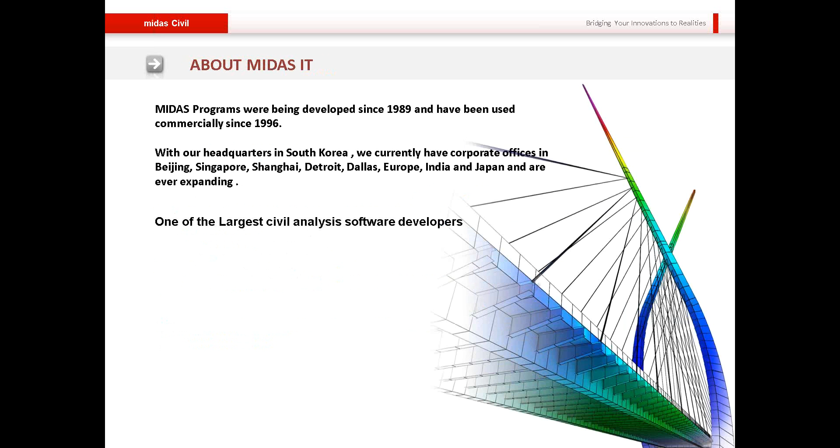First up, about Midas IT. We've been developing programs since 1989, when initially we were formed as an offshoot of the POSCO group, and commercially we have been doing so since '96. We were incorporated in 2001, and currently we are headquartered in Seoul, South Korea, with offices in China, Japan, Singapore, London, India, and the United States as well, and we are ever expanding. We are among the largest CAE software developers in the world, with a proven reliability of over 5,000 project applications, following an intensive quality control system, together with our analyses having been verified by various institutions the world over.

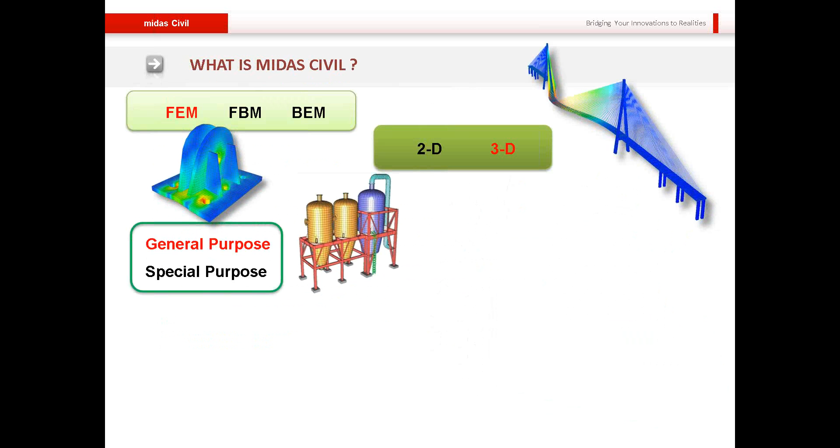Talking about our product, Midas Civil. For those of you who are not aware of the program, Midas Civil is a finite element analysis package specialized for both 2D and 3D finite element analysis. It is at once a general purpose as well as a specialized purpose tool, in that it can be used by both structural and geotechnical engineers. Although it is geared towards the bridge engineer, it is also capable of handling other civil structures like underground structures, basements, buildings, plants, tunnels, and dams.

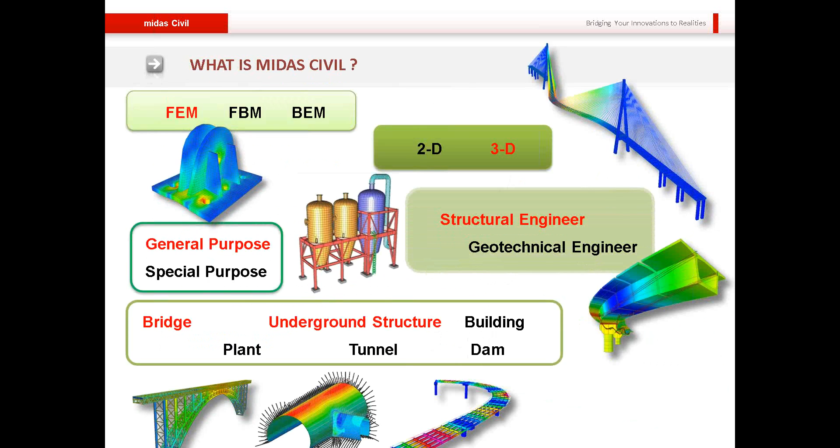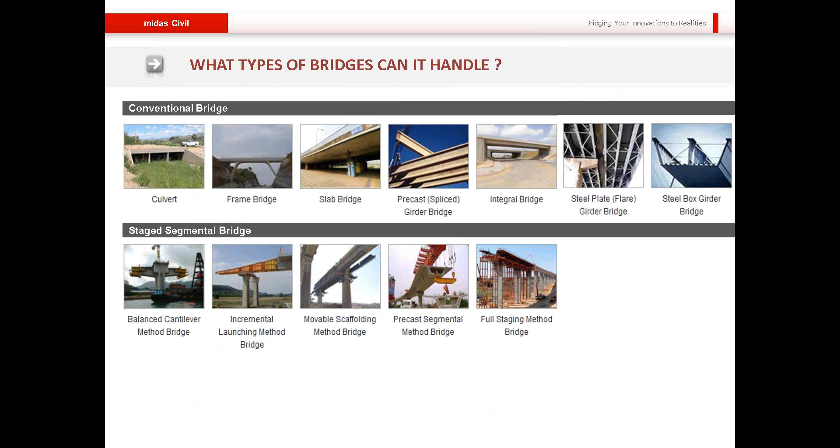Of course, when it comes to design, it is more geared towards the bridge engineers. And speaking of bridges, Midas Civil can easily handle conventional bridge types like culverts, slab and girder bridges, integral bridges, to the more complex staged segmental bridges - for example, bridges constructed using the balanced cantilever method, incremental launching method, the full staging method, and others. The software can also handle the most complex cable bridges: cable stayed bridges, suspension, and extradosed bridges.

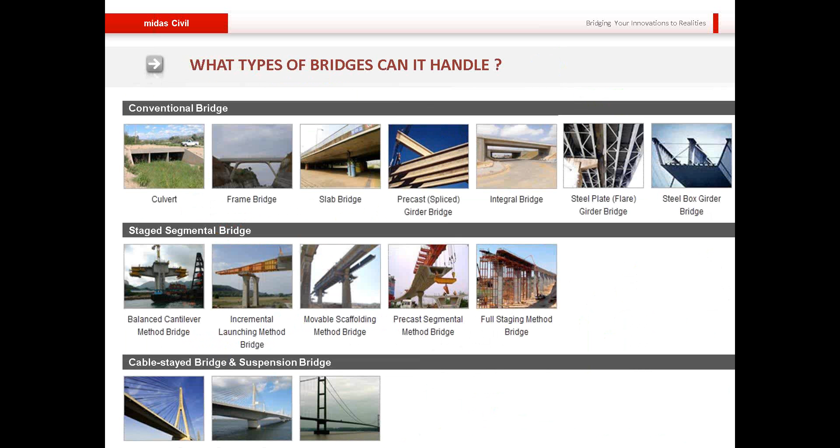Let's now get into the crux of today's presentation. First, let me talk about the modeling philosophy that is commonly associated with cable stayed bridges.

First and foremost, I'll talk about initial sizing for cable stayed bridges. Now, aside from loadings, the pylon and deck geometry and orientation are usually driven not by engineering decision but more by cost and aesthetics.

Engineering decisions usually come into play first and foremost when we are proportioning the spans, particularly the ratio between the side span and the main span. In these cases, backstay forces are a critical determining factor, especially because backstay forces are maximum when the live load is on the main span and at their minimum when it is on the side spans. And because backstay forces usually get the largest stress variation among all the cables, they have to be dimensioned so that these stress variations are kept safely below their fatigue strength.

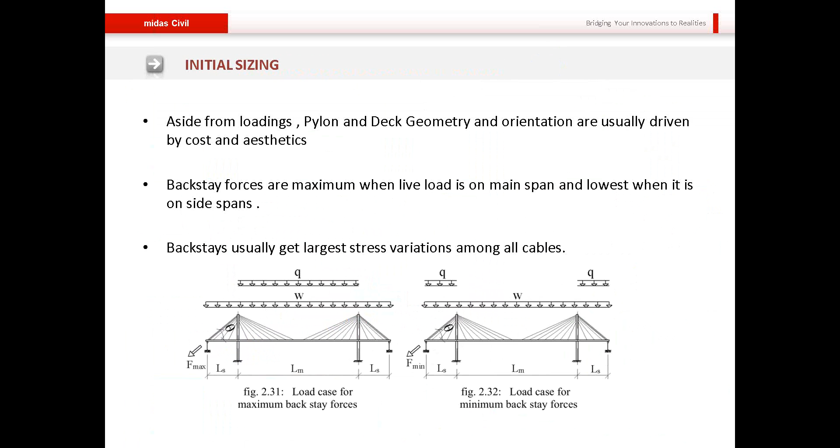A lot of research has gone into this proportioning over the years. One such research by Gimsing and Georgakis in 2011 is what I'm showing you today. On this graph, you can see the ratio between the side span and the main span plotted on the vertical axis, and the ratio between the live load and the dead load plotted on the horizontal axis, and how this compares. The value of zeta shown just above the curves is essentially the ratio between the minimum possible backstay force to the maximum possible backstay force experienced by any particular bridge.

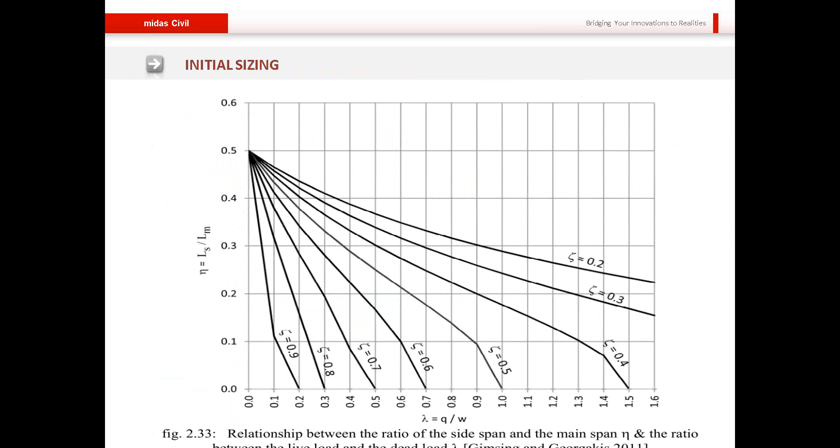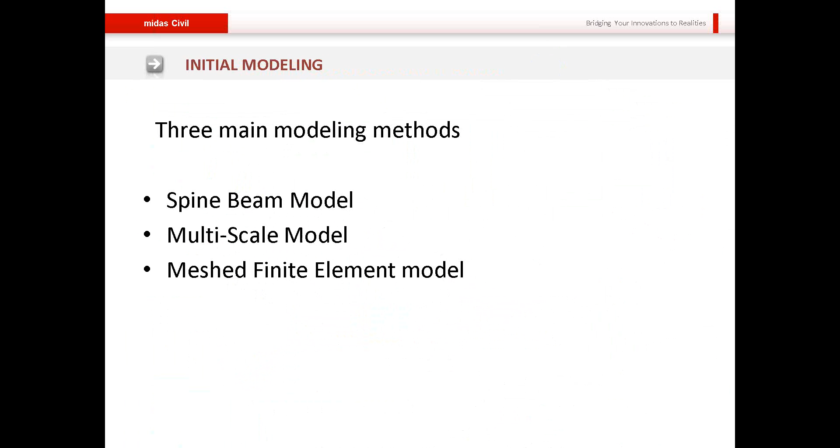Progressing a little bit further, let me now talk about the modeling methods for software-aided modeling of cable stayed bridges. We have three major modeling methods utilized in the world today: spine beam or line beam models, multi-scale models, and meshed finite element models. Let's talk about these one by one.

First up, the line beam or spine beam model. This is the most common modeling method around the world today, not only for cable bridges but for nearly any kind of bridge. The bridge is modeled using beam, truss elements and links which represent the bearing or support conditions. The deck section can be modeled simply by using equivalent section properties like moment of inertia, shear area, and so on. Therefore, it is usually a preferred method of modeling, particularly for an initial estimation or initial analysis.

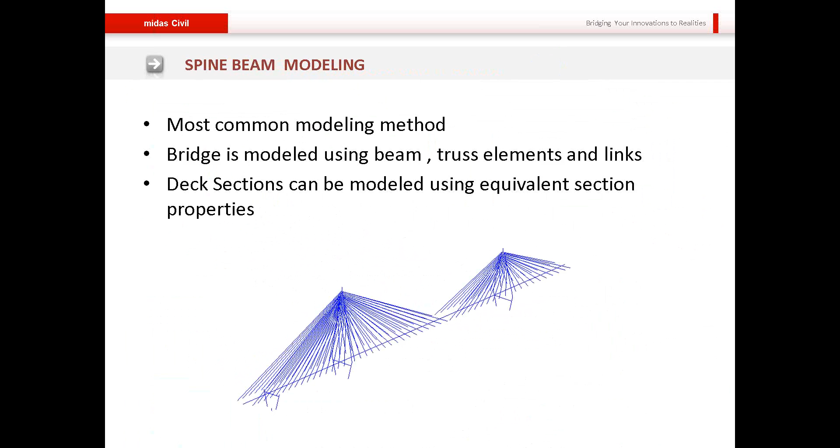Let me talk a little bit about modeling of cables. As we already know, cables are highly nonlinear structures. The stiffness of a cable element is directly dependent upon the amount of axial force that it is carrying. So in normal linear static analysis, this nonlinear effect of the axial force also has to be considered, and to undertake that, the Ernst formula is commonly utilized. So in Midas Civil as well, the Ernst formula is implemented via the use of the cable element, which can automatically consider the effect of sag and modify the stiffness of the equivalent elements.

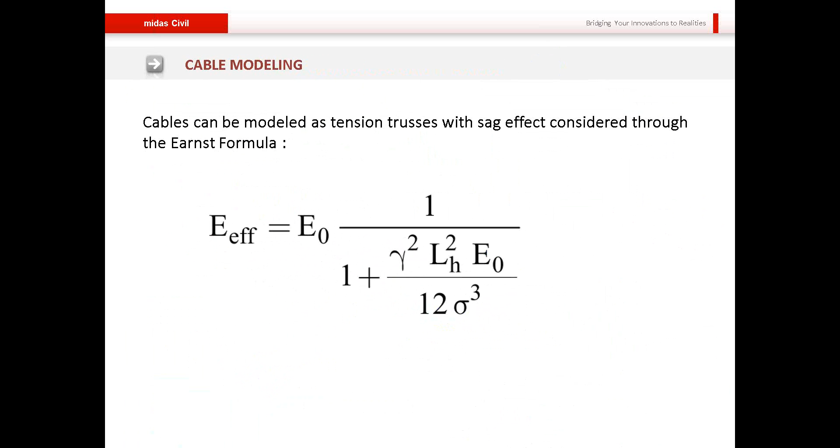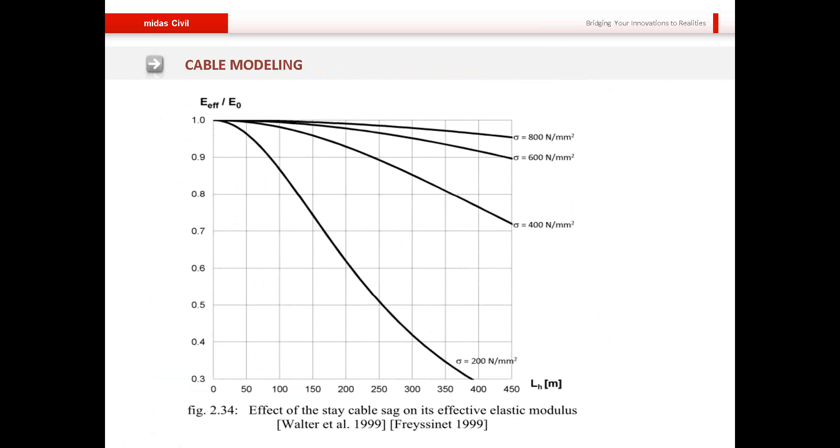Coming now to multi-scale modeling. Multi-scale modeling essentially means that the model is composed of a combination of simple line models or beam elements, plate or shell elements, and solid elements. The major use of this kind of model is simply to capture more accurately the localized results. For example, in cases where very wide decks are being constructed, local concentrations of stresses may arise due to different phenomena, due to different interactions between forces and moments. In such cases, a line model is not enough to reflect these local phenomena.

A point I'd like to make here is that special care must be taken at the interface between solids, shells, and beam elements because they all have different degrees of freedom.

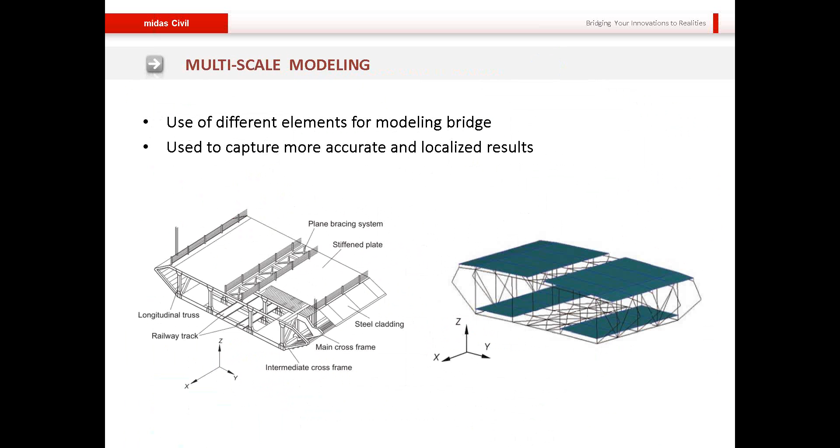Lastly, coming on to meshed finite element modeling. This method of modeling is one of the most realistic and most accurate modeling methods, and it gives the most realistic structural response and provides a very accurate representation of local and global responses as well. Furthermore, in some cases it is also possible to separate the local and global responses. The downside to this is that it is usually quite cumbersome to model an entire bridge using this method, so obviously only certain critical portions are modeled and analyzed.

For example, the anchorage points where the deck is connected to the cables, or in this case, the saddle clamps of particular cable bridges.

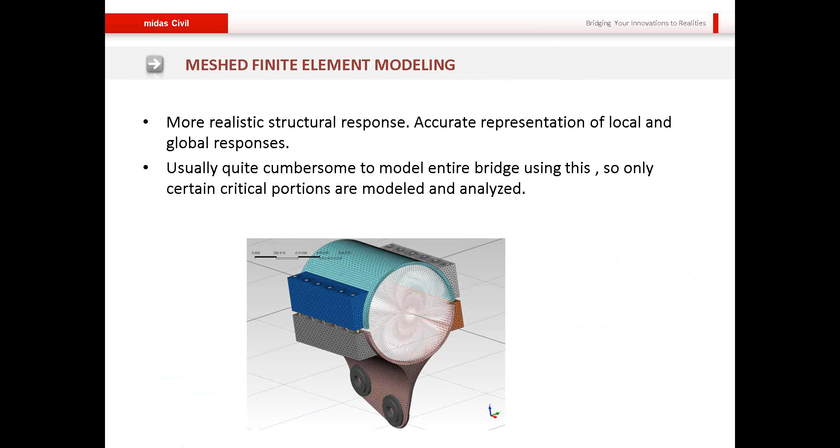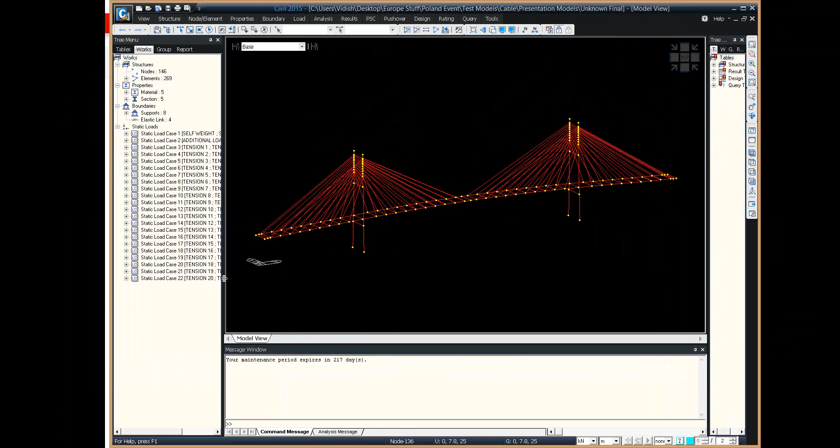Now, before talking about the analysis philosophy, I'll switch over to our software, Midas Civil, and briefly demonstrate the basic modeling methodology and the basic modeling tools available in our program. So this is our program Midas Civil, and this is the basic bridge that we shall be modeling today. We shall be introducing some basic support conditions, the cable elements, and other basic elements as well.

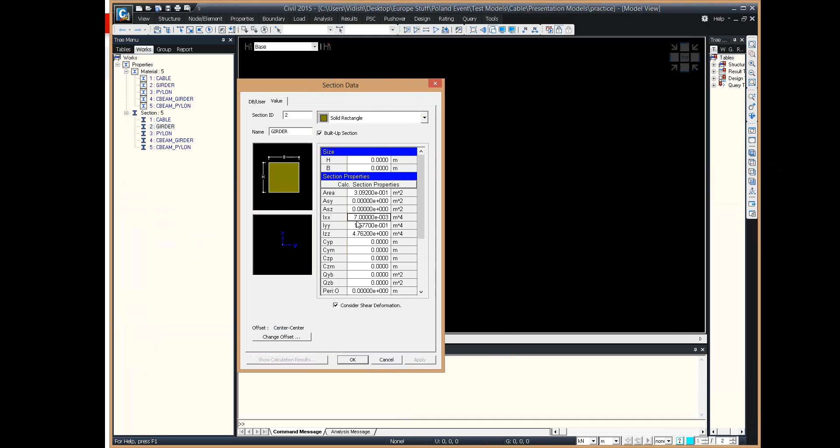I'll just open up a simple model file, an empty file wherein I have only created my basic material and section properties. Most of these properties are user-defined. They only have the representative properties like the moment of inertia, the shear, the basic areas, and so on, in accordance with the normal spine beam model theory. To quickly model this structure, I shall be using the cable stayed bridge wizard.

So this wizard allows me to very quickly and very conveniently define the relative positions of my cable stays, the number of cable stays, and the various parameters for the geometry of my entire cable bridge. I can update and draw so that I can look at what my cable bridge will look like in the software once it has been modeled based on the parameters entered.

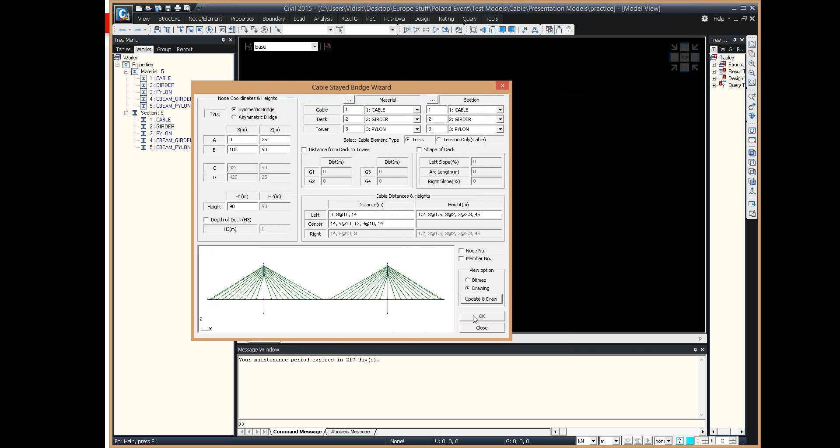So if I just click OK, this is one side of the bridge that has been quickly modeled for me. I shall now copy this 15 meters laterally, since in this case my deck is to be 15 meters wide.

I shall now create the cross members. So here I can choose cross members for the girder, and I can translate these particular members. I can simply copy them over a particular distance, telling them to intersect the nodes and the elements.

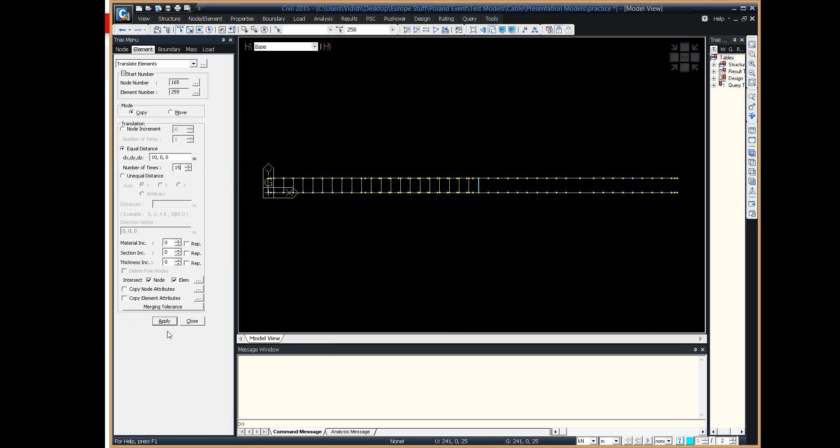For example, if I want to copy it, say 20 times, I can do it like so. Say another 15 times. So in this way, I can very quickly and easily create the properties for my cross beams for the deck.

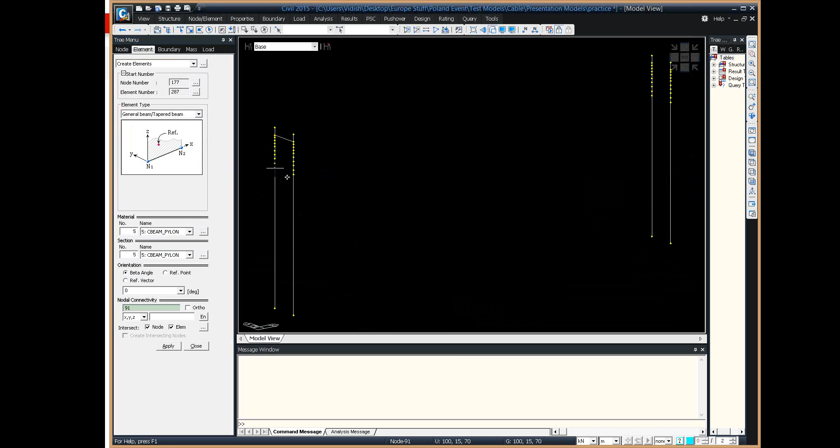Similarly, if I want to create the properties for my pylons, I can do that as well. Just select the relevant properties and apply.

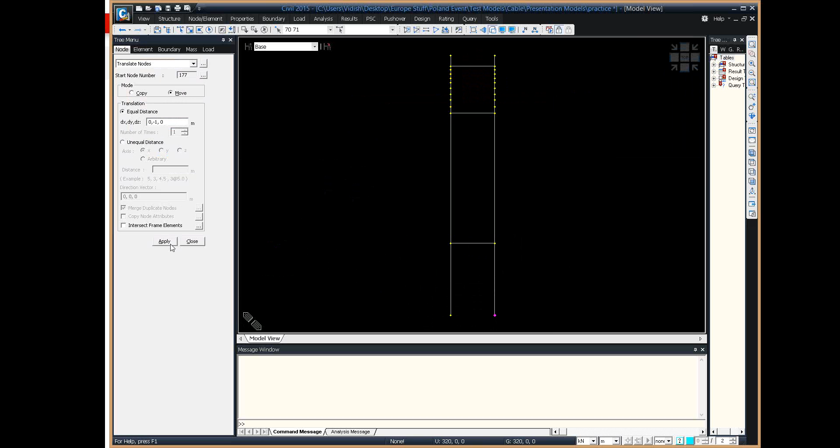Now, in a lot of cases, it may happen that the feet of the bridge may be slightly spread apart. Even that is quite easy to modify in Midas. All we need to do is select, for example, let's say I simply move the nodes, and the elements follow.

So if you don't have perfectly vertical pylons, but instead have slightly inclined pylons, modification of the model is a very, very easy process.

Okay, lastly, we shall just apply certain boundary conditions. So for example, you can apply fixed boundary conditions like so. And furthermore, to apply the same boundary condition to other nodes, I can just select the nodes and simply drag and drop from the workspace.

So the drag and drop feature, for those of you who have used our program, for those of you who know Midas Civil, you're familiar with it. For those who do not, the drag and drop feature works even for changing section properties and material properties. So this was just a little bit about the basic modeling procedure.

I'll now just simply shift over to the analysis philosophy.

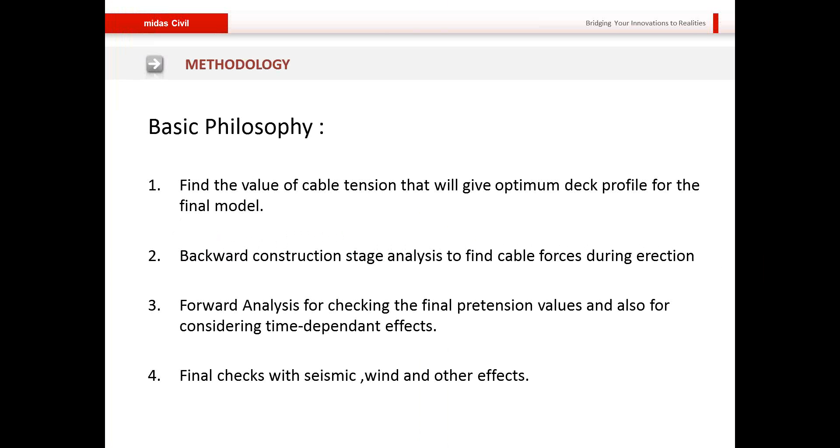So for finding the final cable stay forces, we have three basic methods. These are the continuous beam method, the bending moment envelope method, and the influence matrix method.

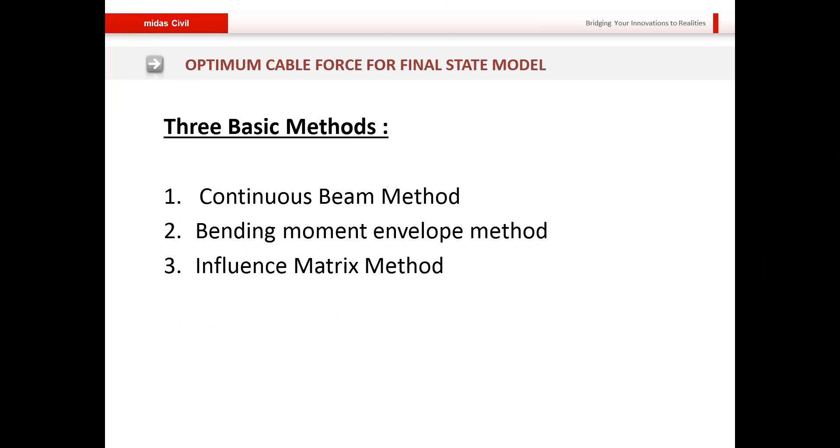First up, the continuous beam method is one where the connections between the stay cable and the deck are idealized as pin supports, and linear static analysis is conducted. Whatever reactions we get from this analysis, we extrapolate them to figure out the cable forces. One of the major advantages of this approach is that the creep in the vertical direction is eliminated at the connection locations.

Of course, one of the major disadvantages of this method is that sometimes it gives us unrealistic or unachievable cable forces, particularly from the economic standpoint.

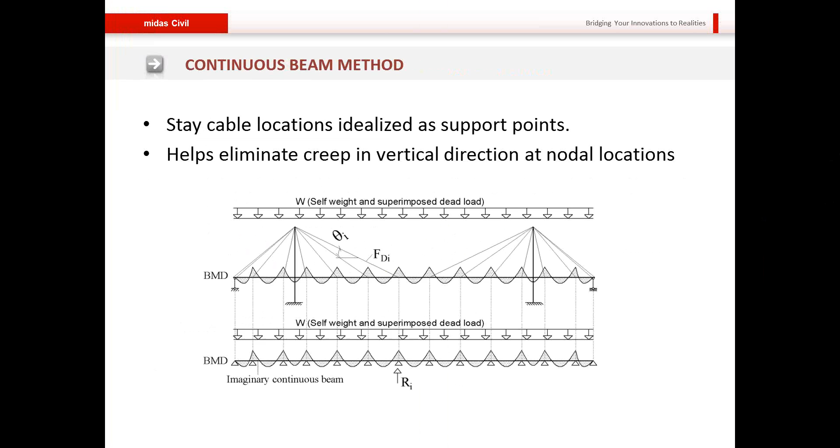So yes, tuning of cable forces will mean that the deck profile becomes more economical. However, it will also mean that we may require more cable material because we are providing a higher amount of pretension. So in this case, the cost of reduced deck dimensions has to be compared with the additional cost of cable material to know whether this is truly an economic solution or not.

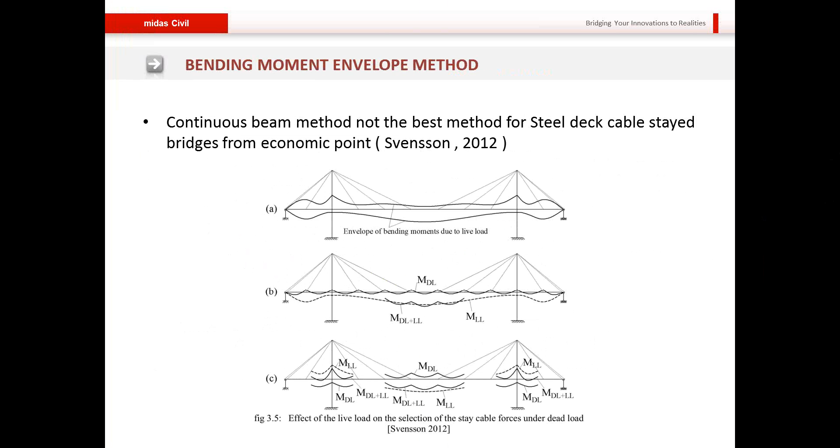Lastly, the influence matrix, or as it is implemented in Midas, the unknown load factor method. This is generally an exception, and is basically an extension of the unit load method, wherein unit pretension is introduced in the cable elements, and the effect of these unit pretensions is observed on the rest of the structure in the form of an influence matrix.

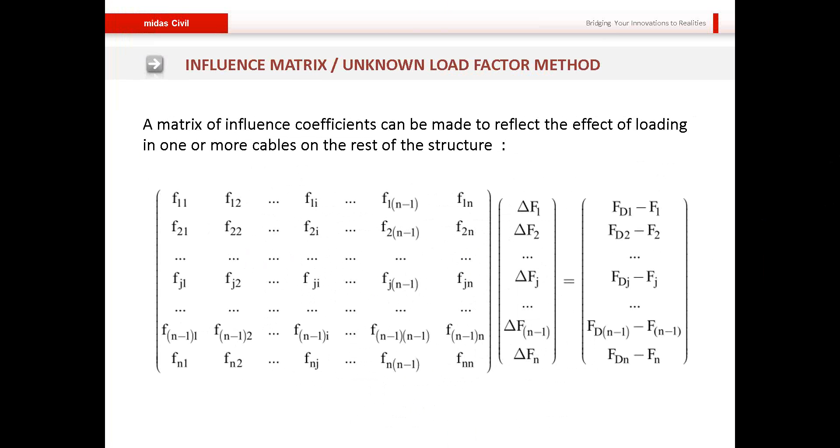Normally, from our experience with the unit load method, we can easily get constraints in the form of forces, displacements, or moments. But the influence matrix, or unknown load factor method, in Midas has also been expanded to incorporate inequalities. So for example, if an engineer wants to constrain the moments in their deck section to a particular range, that range of values can also be incorporated, and the program will give you the cable stay force solution for that particular range of values.

Finally, talking about cable force tuning. Once the idealized cable forces are found out, we would need to tune the cable forces in such a way that the final solution is acceptable to us as engineers. Tuning the cable forces is again a very time-consuming process. So in Midas, we have this cable force tuning feature, which allows you to directly see what will be the effect of tuning a particular cable force, and what effect that will have on the rest of the structure.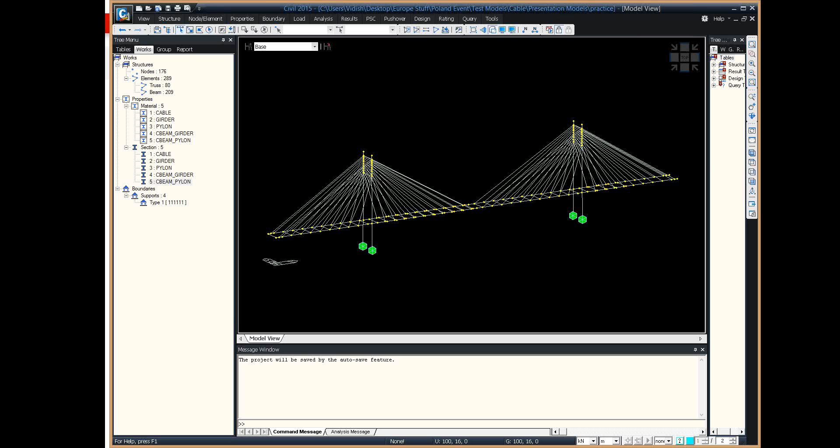So just before moving on, I'll show you these particular features in our software. This is a model that has already been created. As you can see, we have unit pretension across all the cable stays.

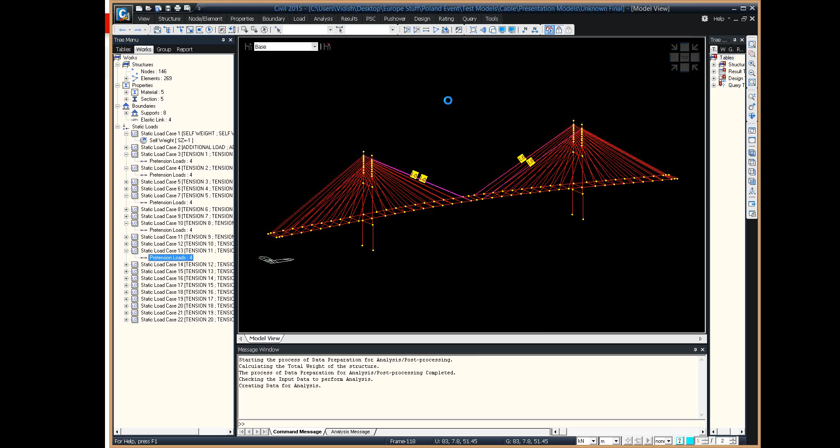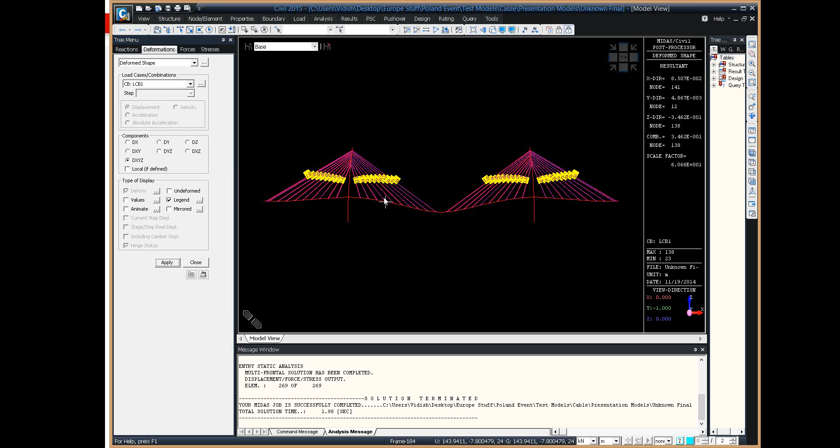Let me just very quickly analyze this. It takes just about 2 seconds. And now, first and foremost, I will show you the deflected shape under the combination of unit pretension and self-weight. As you can see, this is the deflected shape that arises due to the self-weight of the girder, the cables, and a simple 1 kilonewton pretension in all the cable stays.

To find the final state cable forces, we'll use the unknown load factor method. In this method, we work by defining constraints across our deck. Here in this table, we can see what constraints have been defined. These are the node numbers that represent the node locations of the deck. I have specified an inequality, telling the program that I want to find cable forces such that the overall deflection in my deck is between plus and minus 1 centimeter.

So these are the inequalities, these are the constraints that we can define. Aside from that, we can obviously also define constraints in the form of reactions, forces, or moments. So we can define, if we want a range of moments in our deck, we can define that as well.

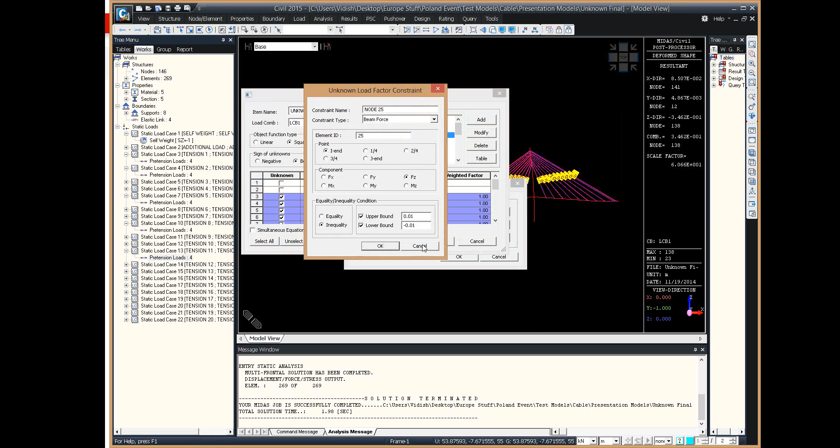So once this is done, we can just go and get the unknown load factors. So we have here, these are the unknown load factors that the program provides us. And in this case, since we have unit pretension, these are the actual pretension forces that we need to use.

We can also get the influence matrix directly. So from here, we can see easily what is the influence matrix for this particular model. And we can generate an Excel file that will create an Excel file like so. So this is the Excel file of the influence matrix for this particular model.

And it includes the equations, so it is an interactive file. You change any pretension value and the overall displacements will be changed as well.

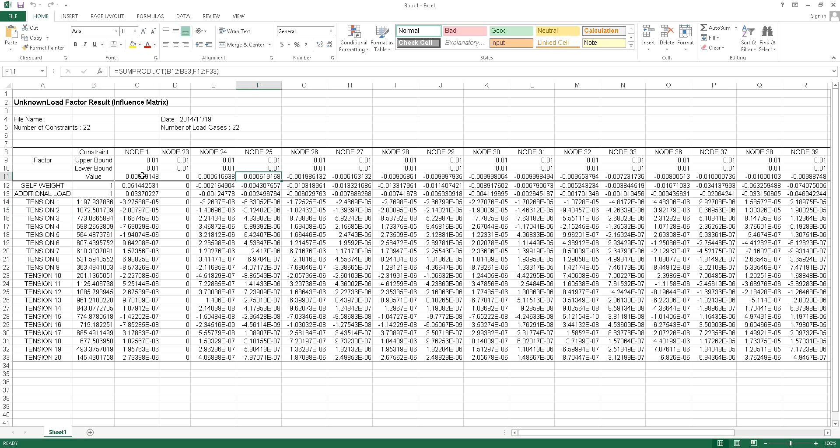So once this is done, we simply need to make a load combination. Since I already have a load combination pre-made, in this case, I will simply shift to that. And here I can show you what is the deflected shape with the new combination of forces with the factored cable stay forces. So as you can see, the deflected shape is much more uniform now.

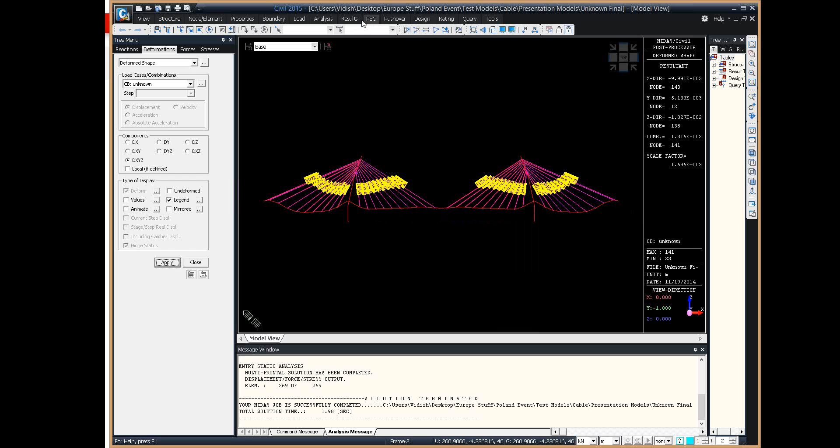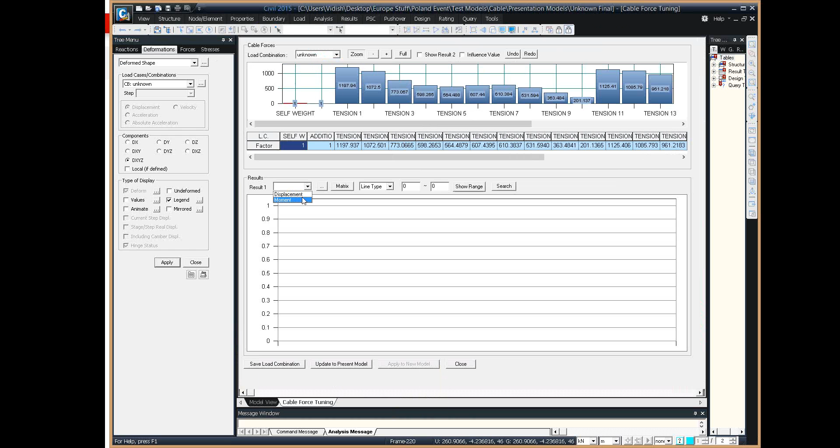Once this is done, we may of course want to go for cable force tuning. So you may want to tune the cable forces for a variety of reasons. For example, to make the deflected shape more uniform, or if you simply want to account for the least count of the pretensioning machinery that is there at the field, since it is slightly hard to incorporate decimal points of pretension values at the field.

So here, for example, this is the curve of displacement. We can observe curves for bending, for stresses, for moments, for forces, and basically for all the parameters, all the result parameters can have their graphs represented here.

Let's say if I change one amount of pretension, immediately I can observe the effect of that change on the displacement curve. And if I want to see what exactly is the location that is most affected on this graph by this change in pretension, I can simply go to influence values.

And with this, I can easily see that changing tension 1 will most adversely affect the mid-span deflections. So if I reduce these, the mid-span deflection will increase. If I increase them, the mid-span deflection will reduce. Similarly, for this case, I can increase or decrease the mid-span deflections or deflections at any other location as well.

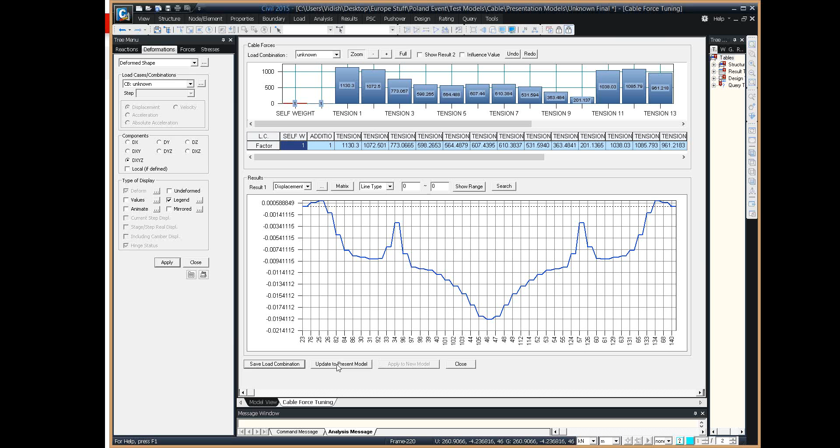So once the deflections have been found out, once you are satisfied with the overall variation of deflections, with the overall curve that you are getting, you can just either save it as a new load combination, or you can update this to the present model file. And once you update this, what you will have in the pretension values will no longer be unit pretension, but instead they will be the actual pretension values that you got from cable force tuning.

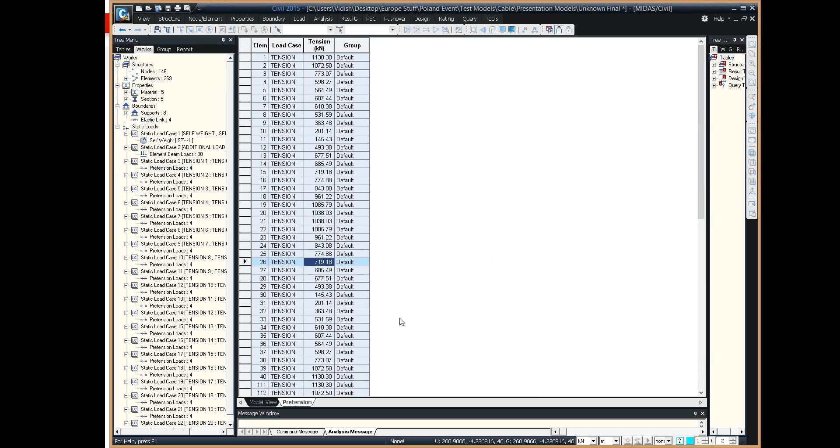So now let me move on with the presentation, and I'll come on to construction staging. Now, in most commercial softwares, construction staging for cable stayed bridges is a two-step process. First and foremost, we do a backward analysis, using which we find out the cable forces during erection. Then we conduct a forward analysis, which is more or less a confirmation modeling, a confirmation action in case of steel bridges, and in case of concrete bridges, it is required for considering the time-dependent effects.

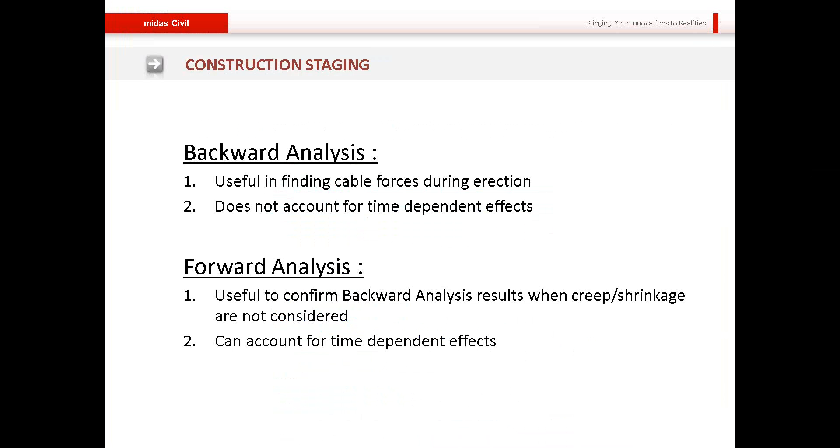Now, in case of Midas Civil, we have implemented a feature which is known as the lack of fit force. So what this lack of fit force means is basically it does exactly the same thing that we wish to find through backward analysis. Lack of fit, in terms that the program has been coded, is basically the lack of fitting the original shape or the ideal shape that the bridge is supposed to have.

So what is the deflection that the model has during construction staging away from the ideal shape? The program calculates this deflection and simultaneously from that deflection extrapolates the amount of force that would be needed to push the segment back to its original position. This directly gives us the actual additional amount of pretension that is required during stay cable erection.

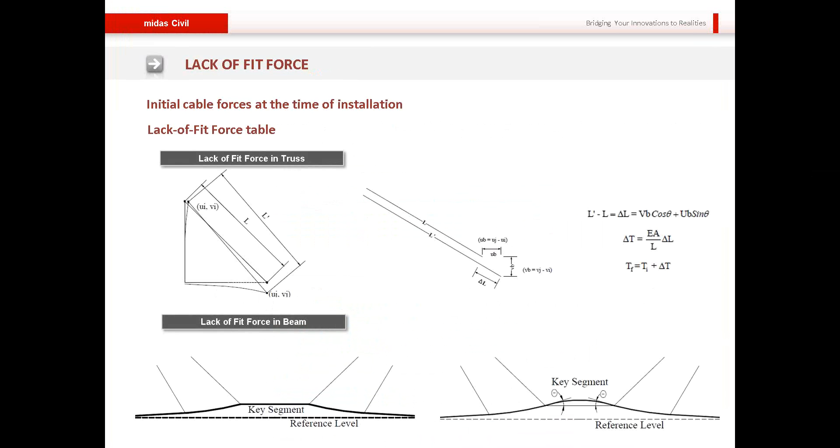Therefore, in summation, if you're using Midas Civil to model and analyze a cable stayed bridge, you don't really need to do a backward analysis. You can simply go ahead with the forward construction stage analysis and just turn on the lack of fit force option, and automatically the program will account for the additional erection forces during construction, and it will add them to the existing cable forces.

Talking a little bit about camber as well, because camber is particularly important in case of cable bridges since they are so sensitive to any and every kind of deflection.

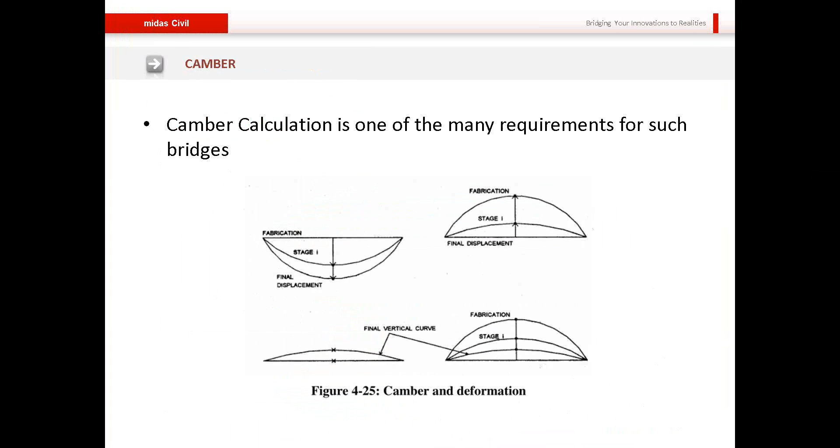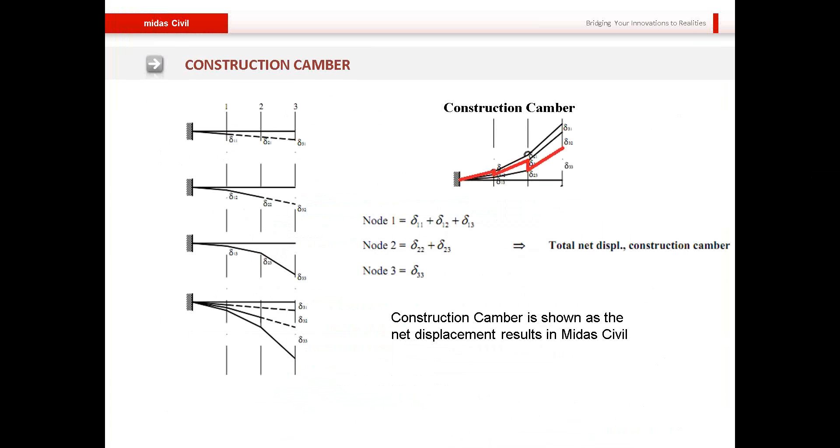Midas is capable of providing both construction as well as manufacture camber. In case of construction camber, the program can provide camber graphs, and the user can also glean the camber values directly from the deflected shape. Furthermore, even manufacturer camber can easily be obtained through an option known as initial tangent displacement for erected structures.

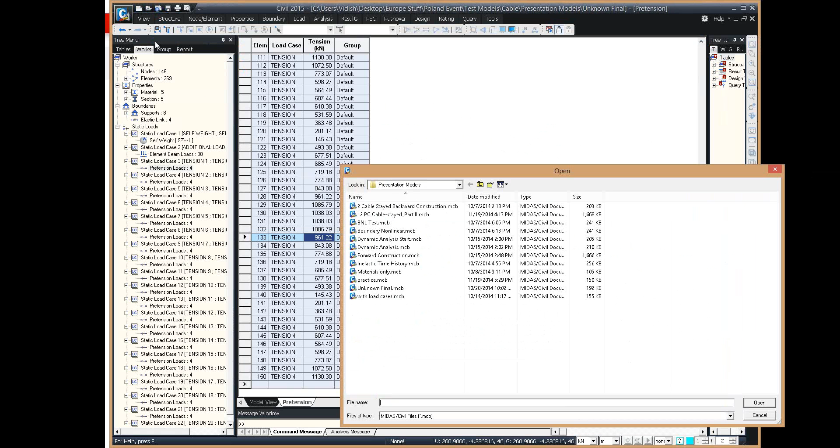Now, before coming on to discuss the nonlinear effects, I'll just briefly discuss with you the procedure for backward construction staging.

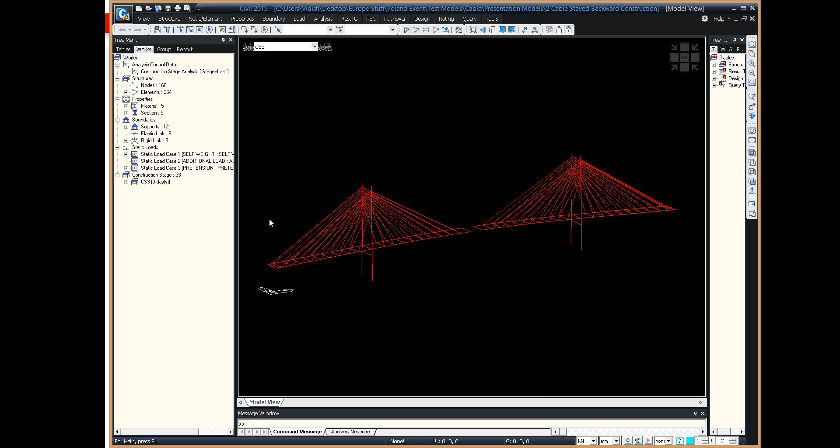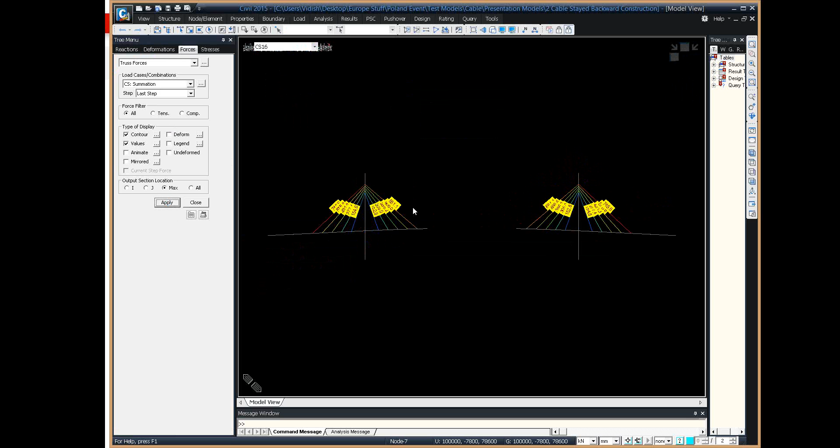So of course, in Midas, backward construction staging is also possible, and this is the basic procedure one goes about for it. From the final state model, we go on dismantling the bridge in an order reverse to that of the normal construction scheme. At each and every construction stage, we observe the forces in the truss, or in this case, the forces in the cables. Whatever forces we get just before that cable is removed, those are the forces to be implemented at the time of erection, or what one would call the first stressing. This is a manual process and a very time-consuming one as well, especially if a large number of cables are present in your model.

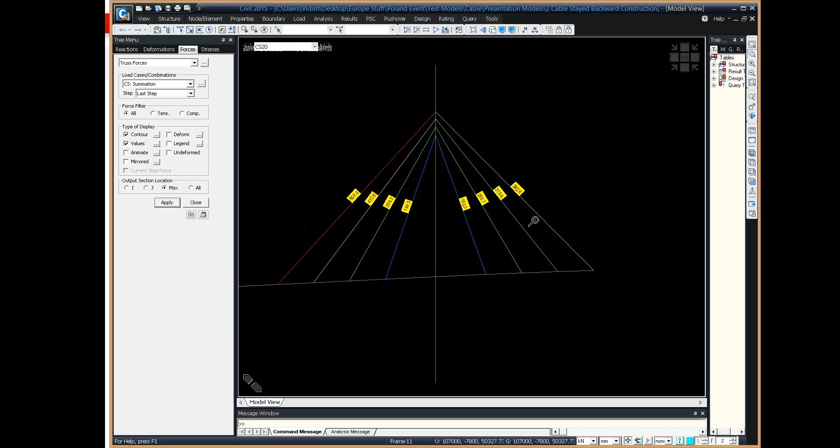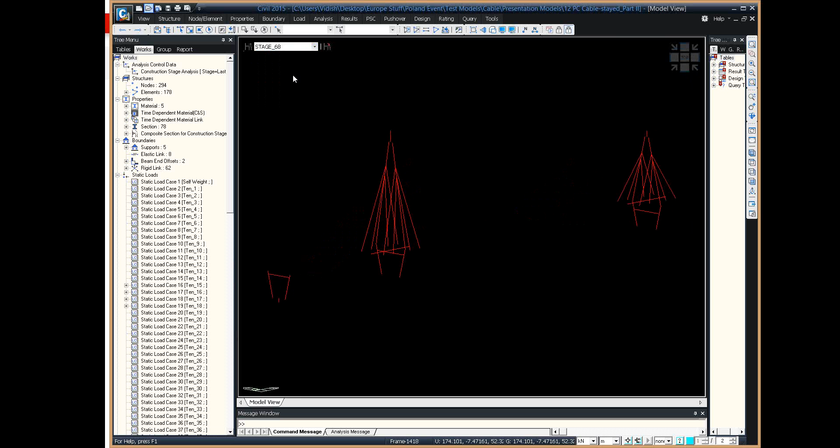Moving on to forward construction staging, I'll show you a slightly different model. This particular model is based on a live project application, and in this model we have about 100 construction stages, starting right from scratch, progressing in the normal forward construction scheme, getting to the final stage.

Right. So first and foremost, talking about the lack of fit force: as explained in my PPT, the lack of fit force option is available from the construction stage analysis control, wherein we simply select a group of elements for which the lack of fit force is to be calculated.

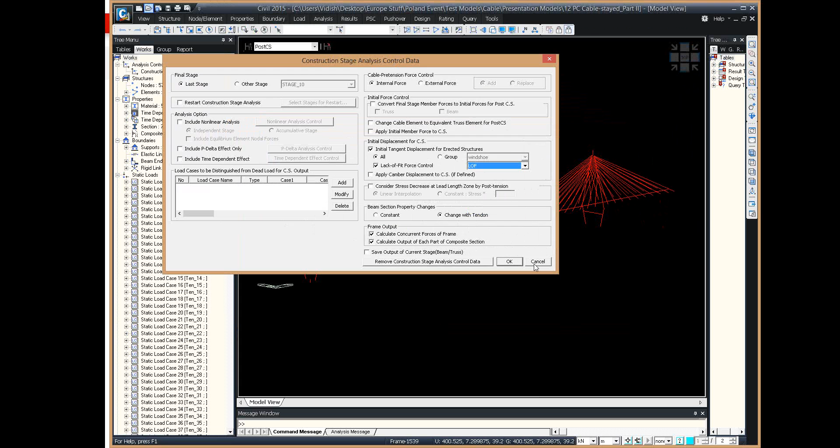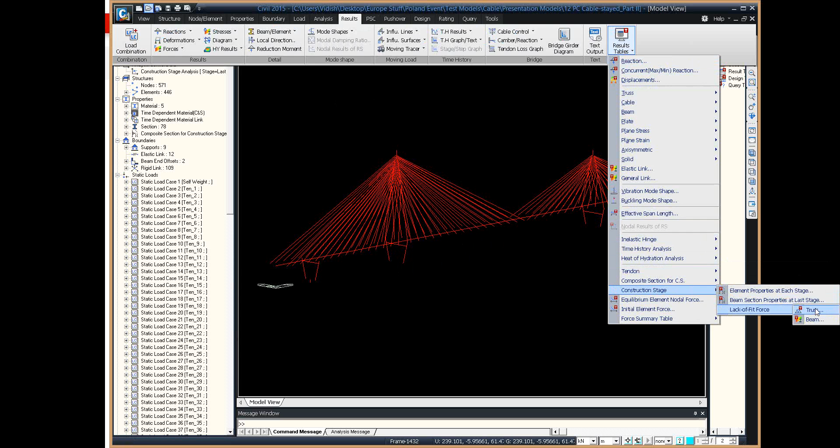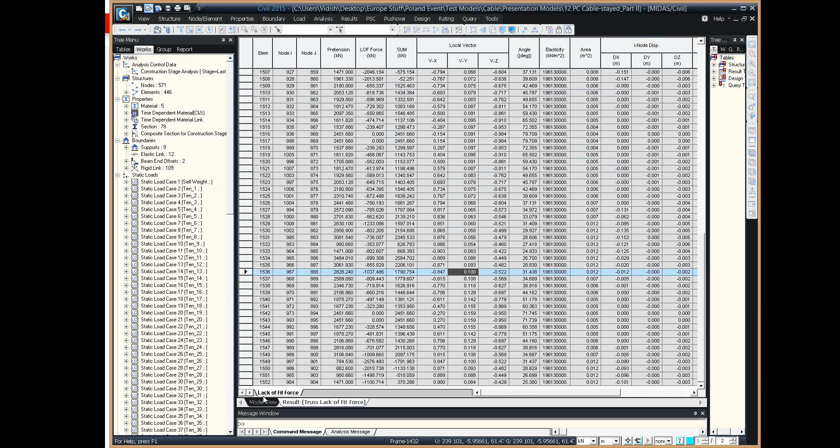At each point, the program will analyze the structure and observe how much the model deflects during construction staging away from the ideal shape, or the pre-analysis shape. Based on that deflection, it will get the lack of fit forces. To observe the lack of fit forces separately, we can easily get them from this particular option, and these are the additional lack of fit forces required to be input into the cables. The program is capable of automatically adding these forces into the construction stage results.

Furthermore, talking about camber, I'll directly show you the camber graphs. These are the construction and manufacture cambers for this particular model. We can easily get the different camber curves for both the construction staging as well as for the final manufacturing stage.

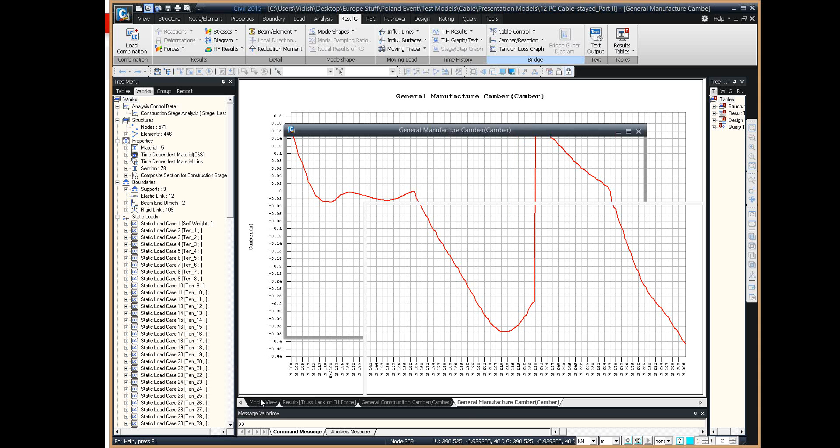Let me now come on to the last leg of today's web session, that is nonlinear effects. I'll talk about the three major nonlinear effects that plague cable stayed bridges: the sag effects from the cables, P-delta effects or second order effects, and large deformation or third order effects.

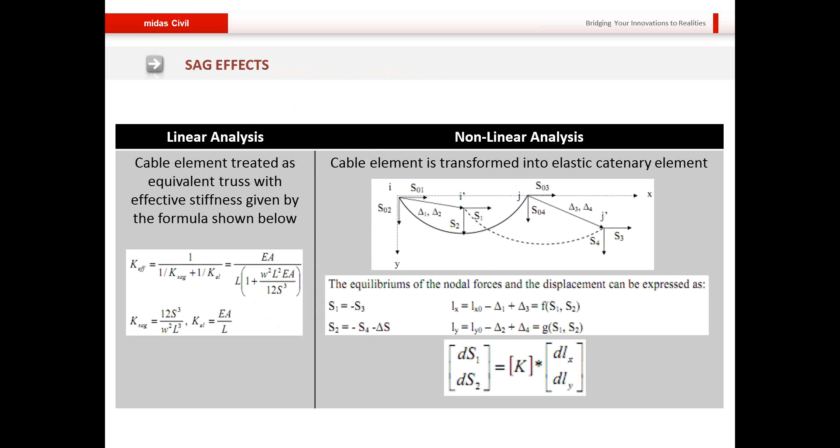Sag effects from cables can be accounted for in both linear as well as nonlinear analysis. In linear analysis, it is accounted for by means of the Ernst formula, which I had already shown you, by transforming a cable into an equivalent truss element with an equivalent stiffness. In geometric nonlinear analysis, cable elements are treated as elastic catenary elements, with their stiffness matrices being changed at each and every iteration of loading.

Talking about second order effects or P-delta effects. For short to medium span bridges, the deflections can be quite small, so second order effects can be limited to simply the live load effects. However, for medium or long span bridges, these can become quite significant and therefore need to be considered for both construction as well as final stage calculations, and also for the dead load effect as well.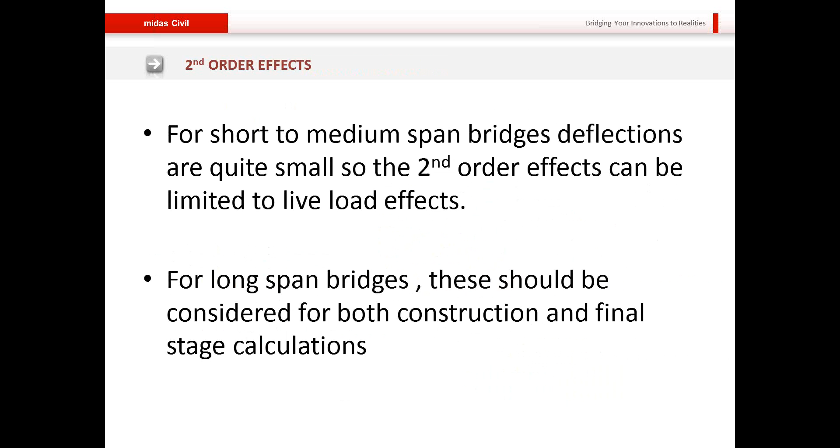So when we say second order effects in cable bridges, we mean both cables as well as the overall deck sections. Because of the segmental nature of cable stayed bridge construction, the deck usually experiences a high amount of axial force, and because of that, the P-delta effect is present even for the decks.

Talking about third order effects for very long span bridges. This is usually required for bridges whose spans exceed something like 600 meters or more. In such cases, large deformation analysis may be required, and this is usually done as geometric nonlinear analysis. Midas provides options for geometric nonlinear analysis as well, for both backward and forward construction staging. So let me show you these options now.

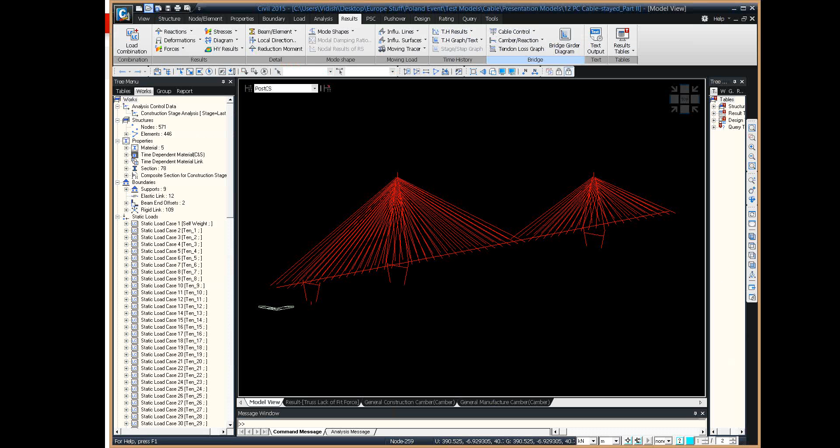So once again, from the analysis control, here we have the different options for P-delta and for nonlinear analysis. For most bridges, P-delta analysis is quite sufficient from short to medium span bridges. So here, if we include the P-delta effect, this will consider the P-delta effects across the entire construction stage, across the entire sequence of construction staging.

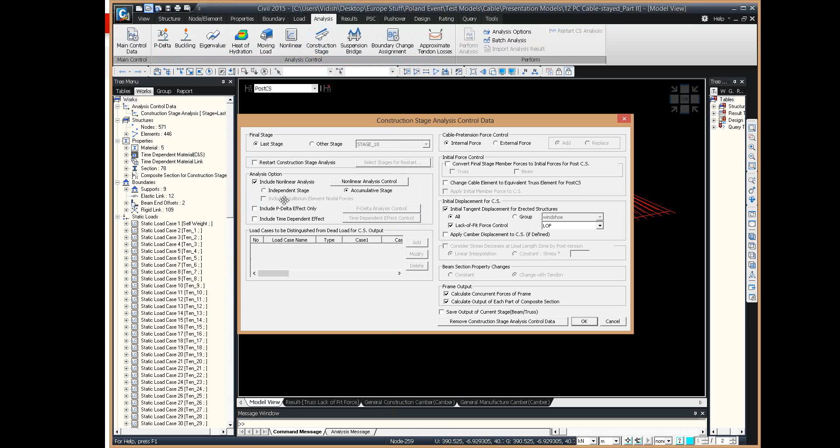For very long span bridges, nonlinear analysis can be implemented, and in this case we have options for independent and accumulative staging. The independent stage is basically applicable to backward analysis, while accumulative staging is applicable to forward analysis. Here you will notice we can also include the time-dependent effects. So if you have a concrete bridge or a concrete deck structure, creep and shrinkage would need to be included in that case as well.

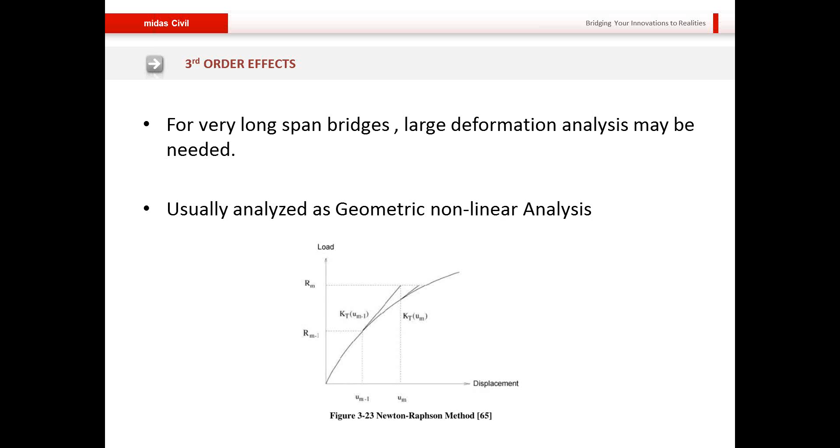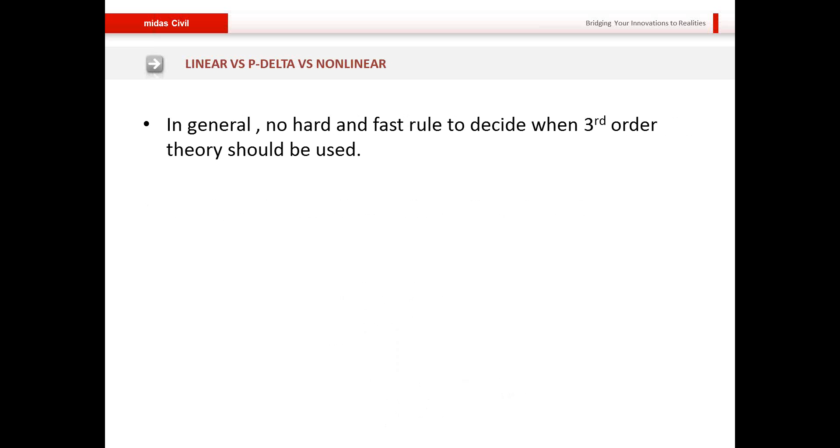And lastly, let me give you a very brief comparison between linear static, P-delta, and nonlinear analysis, particularly their requirements for cable stayed bridges. In general, there is no hard and fast rule to decide when third order theory should be used for cable stayed bridges. There have been many researches to investigate potential cutoff points that differentiate between the requirement of P-delta and full-blown nonlinear analysis.

For short span bridges, for example, Virlogeux and others have suggested that dead load distribution can be analyzed just as a first order effect, and second order checks should only be done for live loads. The same researchers have also specified that for medium span bridges, the P-delta effect should be extended to dead loads as well.

In case of geometric nonlinear analysis, Wang and others have suggested that for main spans beyond 600 meters, third order theory is recommended. Now, these are just a very few researches that I have quoted in my presentation. Of course, other researchers may propose other limits or other values, and engineers may propose other limits or values based on their experience. At the end of the day, it truly boils down to what is the requirement of the engineer based on his or her project.

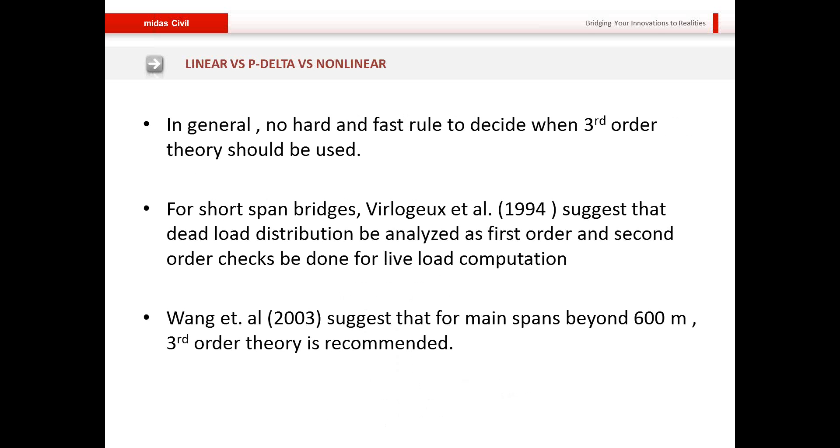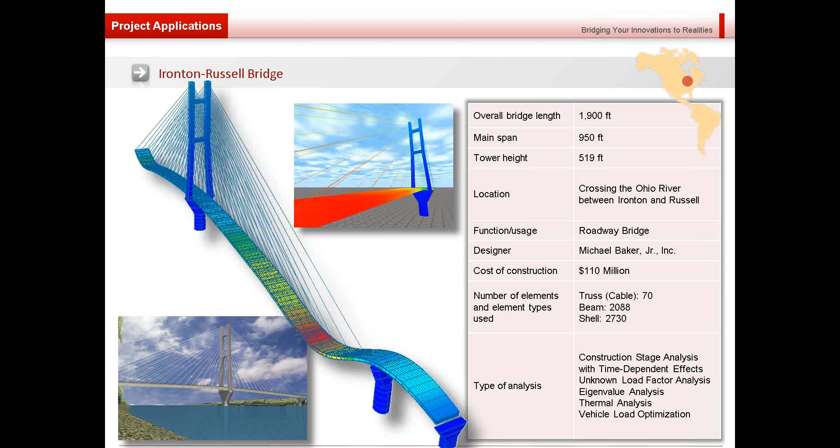So speaking of projects, I will bring my session to a close by talking a little bit about our project applications. First and foremost, we have the Ironton-Russell Bridge, crossing the Ohio River in USA. The Weirton-Steubenville Bridge, again crossing the Ohio River, again in the USA.

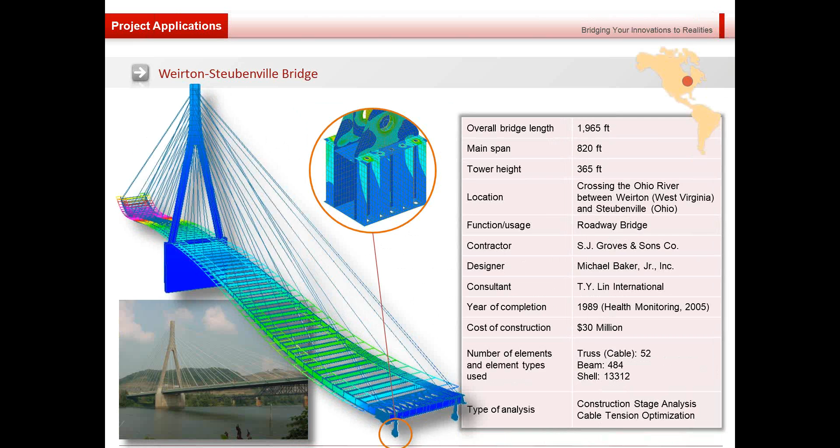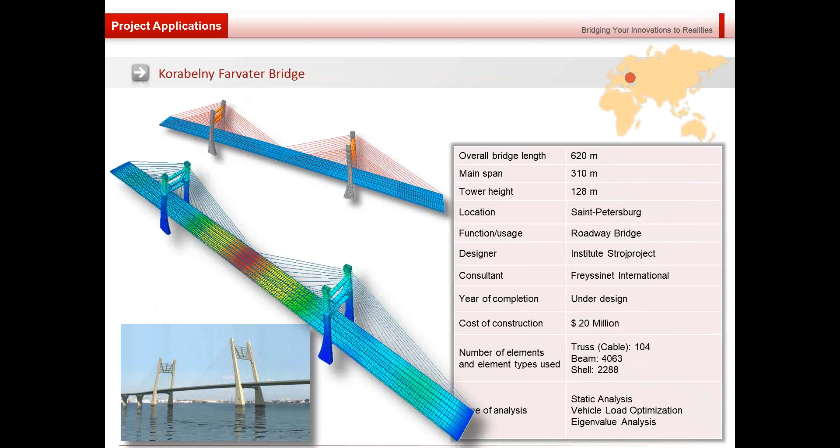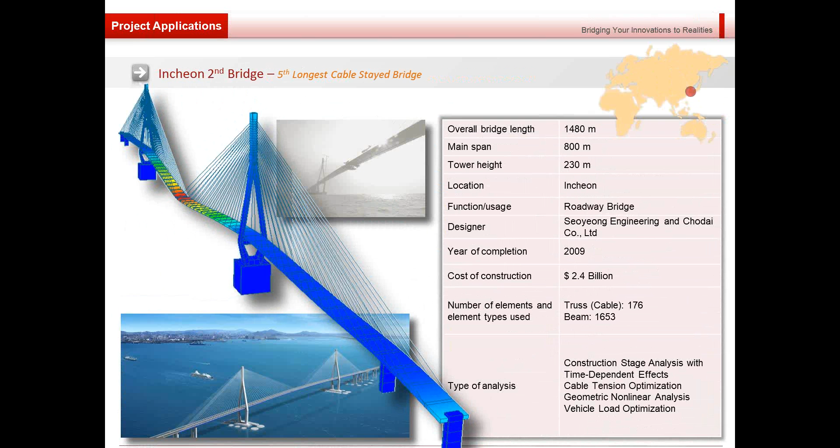Some record holders now. First and foremost, we have the Incheon Second Bridge, which is the 5th longest cable-stayed bridge in the world today, with an overall bridge length of 1.48 kilometers, main span of 800 meters.